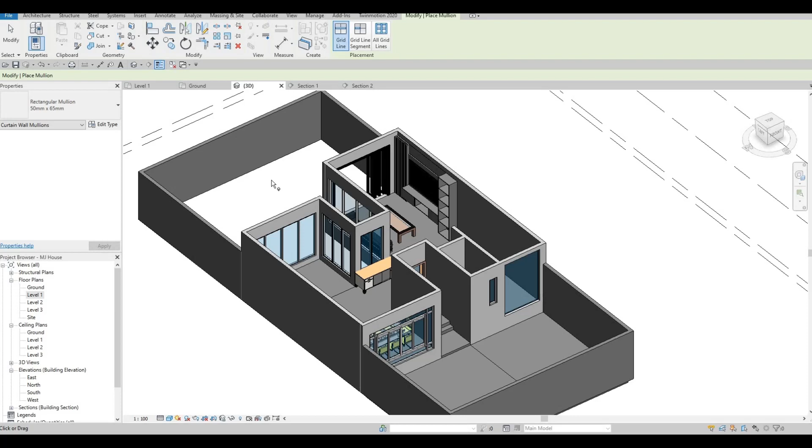So in the previous video, we were able to finish the entertainment center, then we added the stairs right here, and the flooring for the grass, and the carport right here. So now we're going to continue working on this. What I want to accomplish in this video is to finish off the backyard.

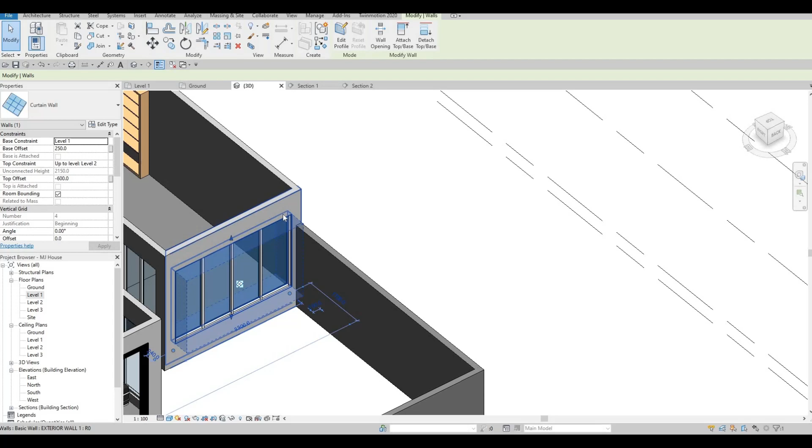What I want to do is go back to level 1, and I probably will need to delete some part right here, because I want to move this one to make it smaller, so I get basically an L-shape kitchen right here. So I'm going to delete this so it's easier for me to just add.

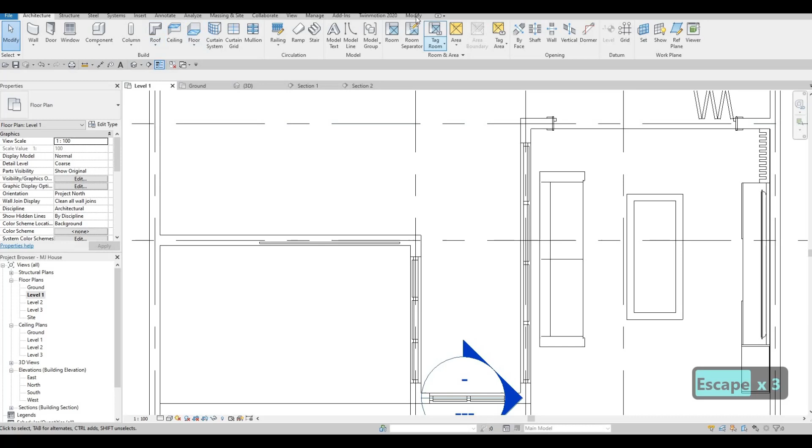I'm going to select this one, CS, and it will maintain the height and the distance from here, so it's easier to just set one first and then do the others. I'm going to cut this one right here, and make sure to make this one L-shaped because we're planning to add more of the kitchen parts right here. After that, I'm going to go to 3D, and as you can see, it maintains the parameters that we set right here.

So now what we're going to do is go back to architecture, click on curtain grid, and then select that one, and add in the mullion all grid, and simply add it like that.

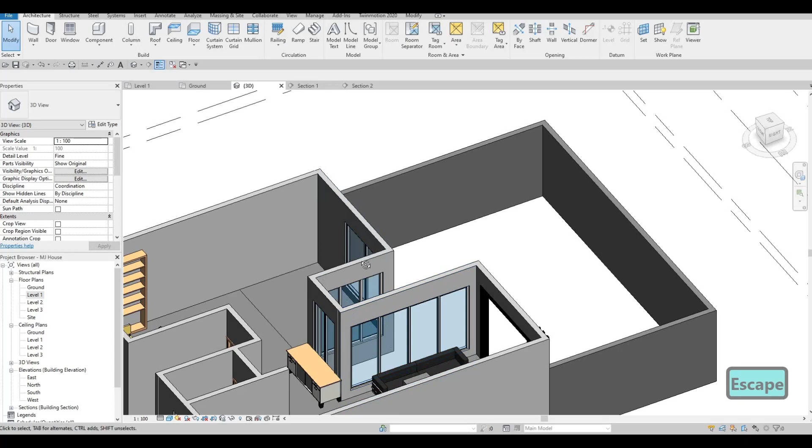So once you're happy and set this up, I'll probably add the laundry right here. This is where the location of the laundry will be, but it's only going to be accessible from the outside.

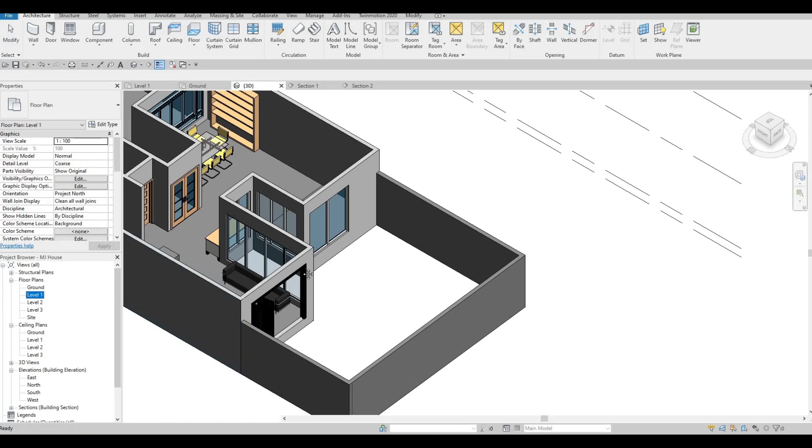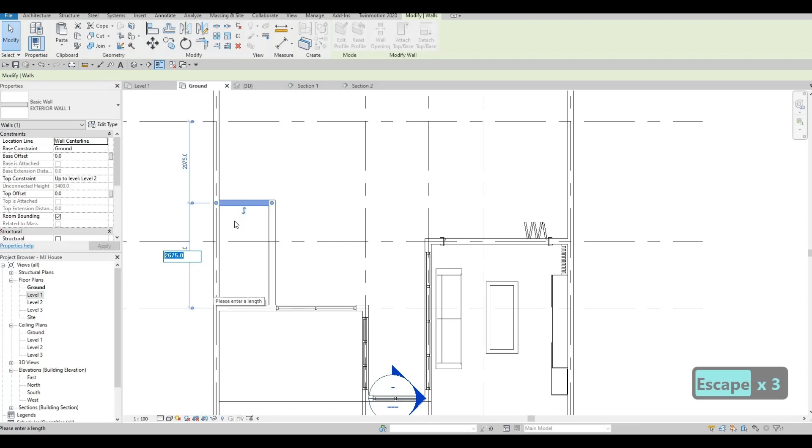So now what I'm going to do is create an extrusion wall. I'm going to go to ground floor and CS on this, and add a wall right here. So it's around, let's make it around 2600 and then 1400, so around 2600 from here, and this will be around 1400 for this, just more than enough space for the laundry.

And then if we check this one, it will look like this. So what I'm planning to do is extend this one all the way right here, and then here this wall will be extended as well.

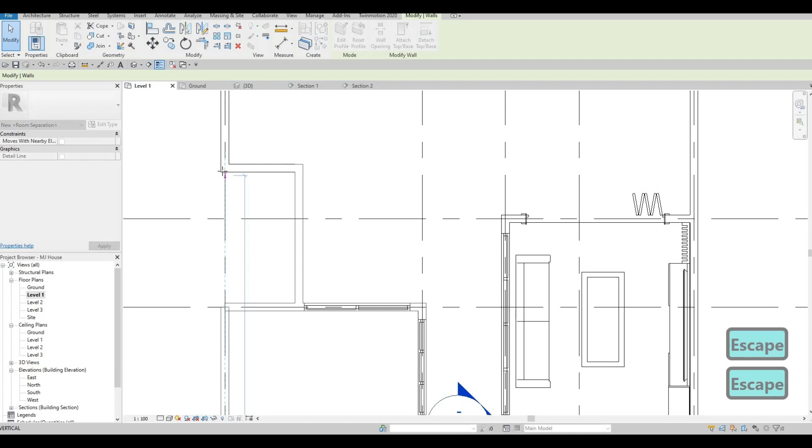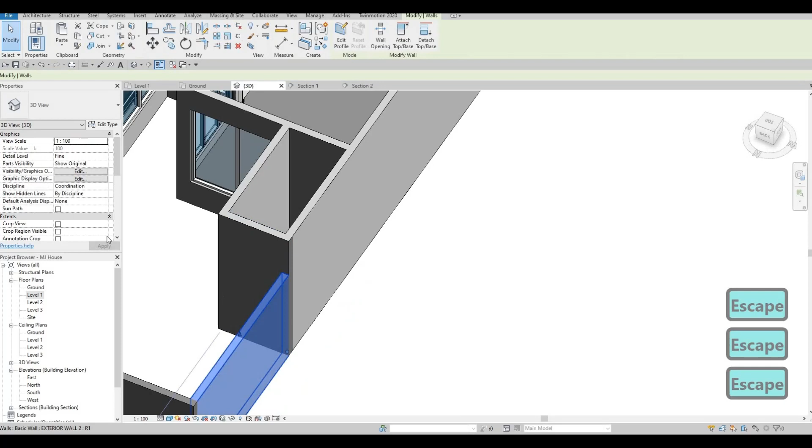So we're just basically adding enough wall on this side, and then here it should be exterior wall, and here exterior wall, and this one is exterior wall number 2. And here, as we remember, we have a different finish.

So this one is concrete aggregate, and what we're going to do is split it this way so that we could have the same materials on all of this. So we're going to split those ones later on, and I just want to change where this is located.

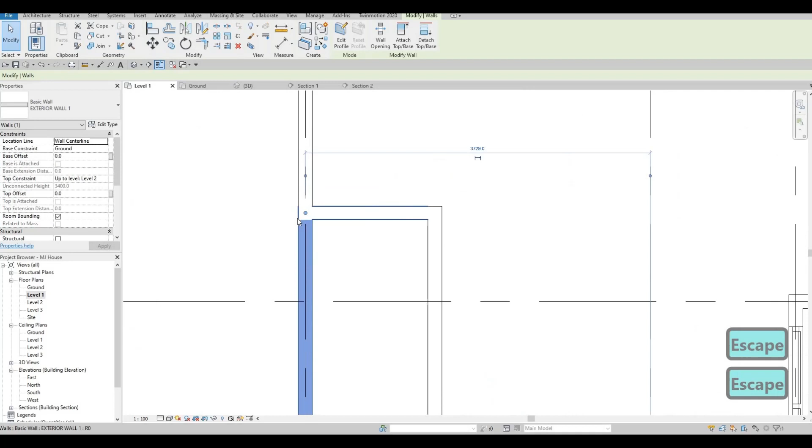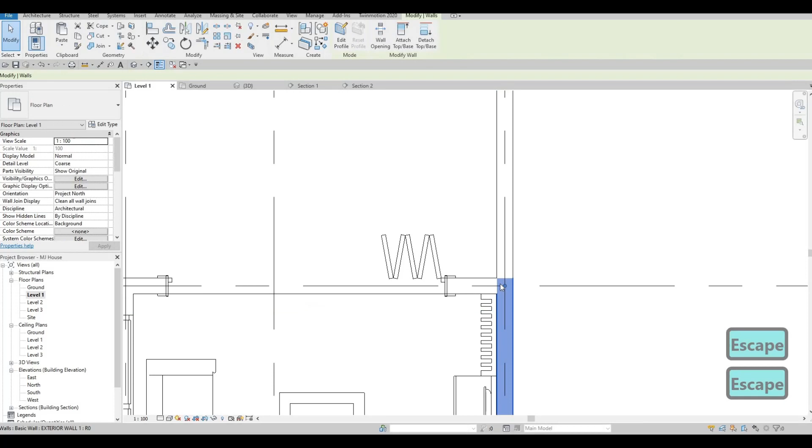And then I'm going to trim this out and put it back. I just want to fix where the joining wall is. Similar to this, we want the joining wall to be on the edge, so I'm going to undo this.

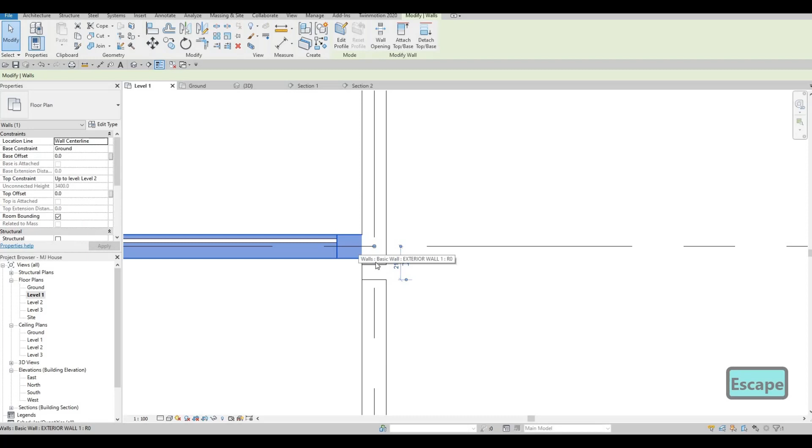So now this is the bigger wall, so it's easier to do later on. Same thing goes right here. Pull this one back first and then change the location of the joining wall.

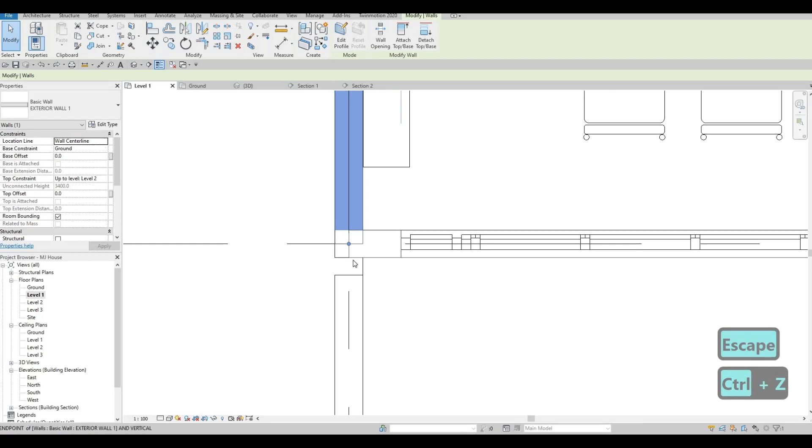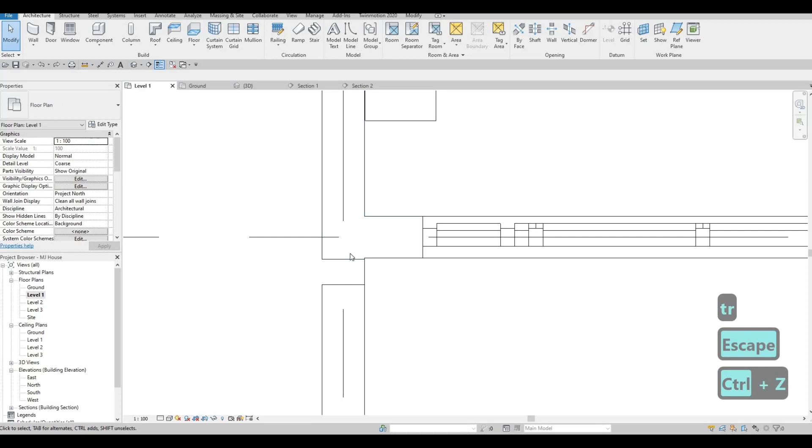Usually once you move it up and pull it back, trim it first, and then now this is the one, because I want this one to have it. So I'm just going to align this AL, and then this is the one that has that. So once we do it, we only think of the face right there.

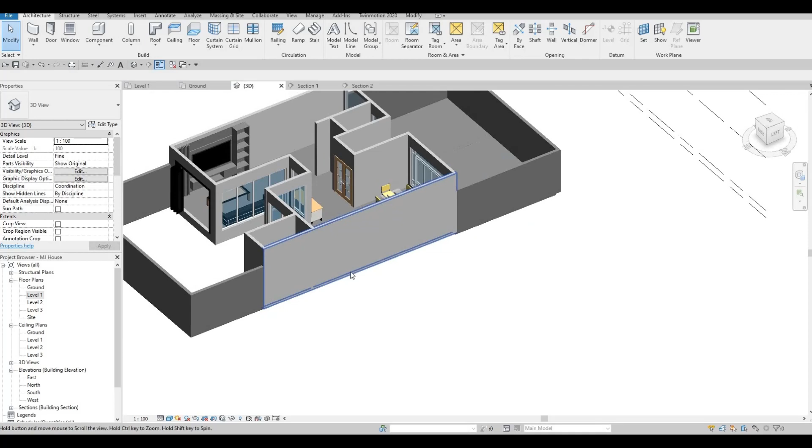So might as well do it now. I'm going to edit this type before we forget. So CS on that, and then you need to select split face, select this face.

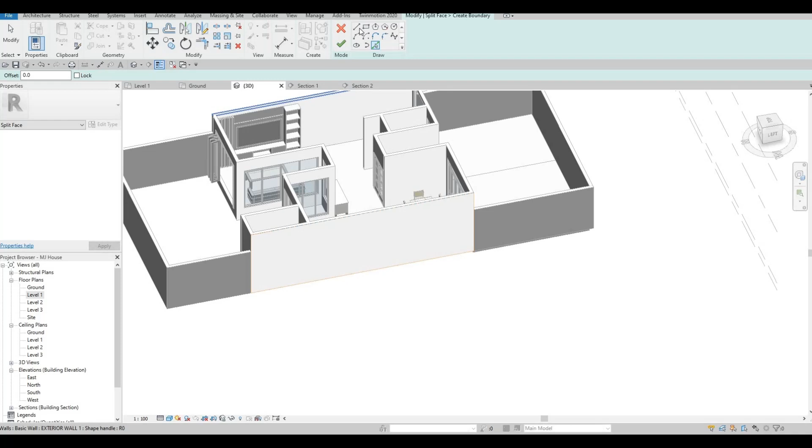Once you do, we need to create a line. So I'm going to create a line from here all the way to there, and then click on finish. After that, click on paint and then look for the same concrete and select that. So now it will be the same one as what we have before.

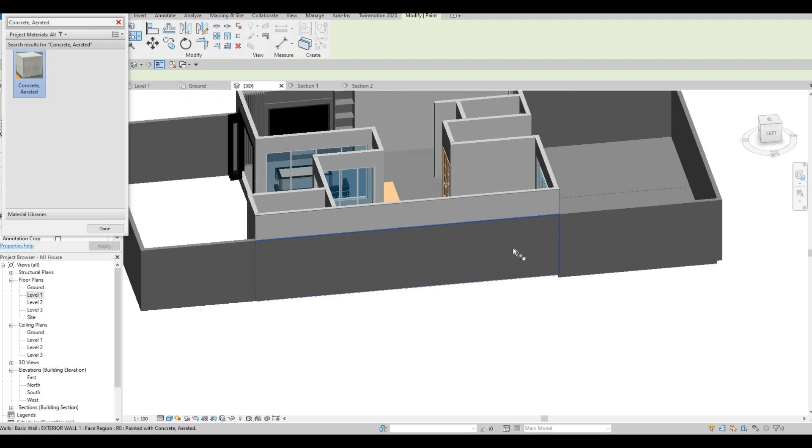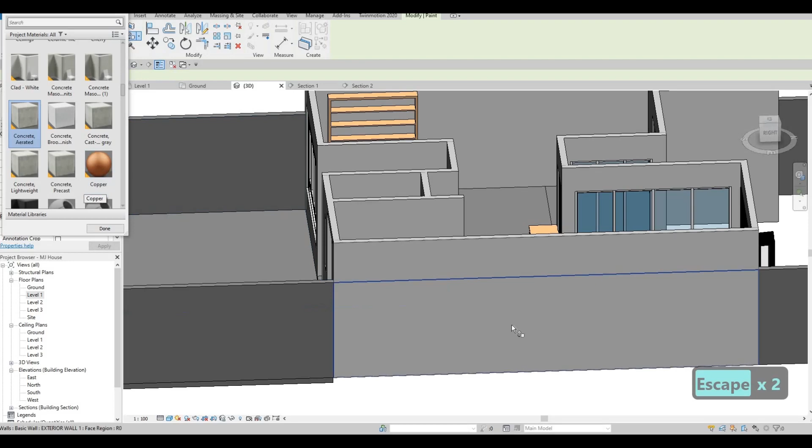At the same time, let's do it on this side as well. Split the face, and then we need to create this line right here, click finish, and then click on paint, same thing. So it looks like everything is the boundary wall, and then only this one is on top of it. This one got created on top of it, so that looks nicer.

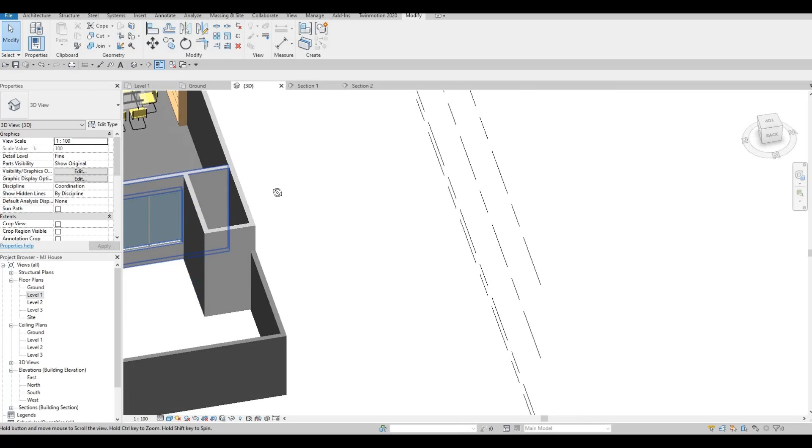So now let's go to this side. We're probably going to pull this one lower than the others, so we might just add the top right here, or we could just leave it like this. So that's good enough.

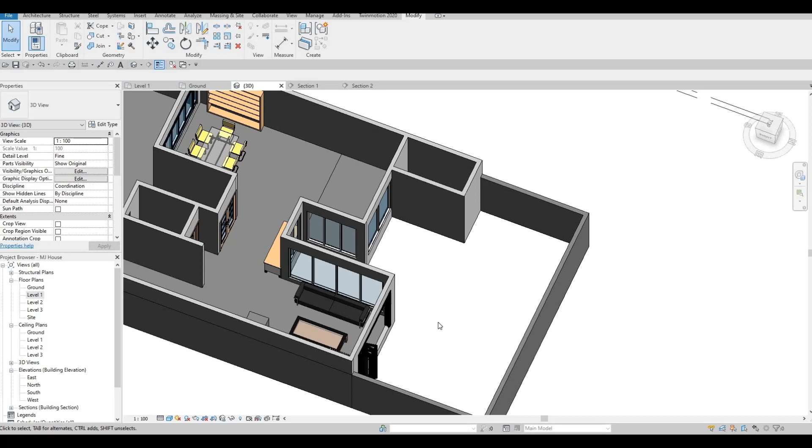We're just going to add a roof right here, and then here we could have a deck that goes around, and then we have our swimming pool right here. So let's create the swimming pool first.

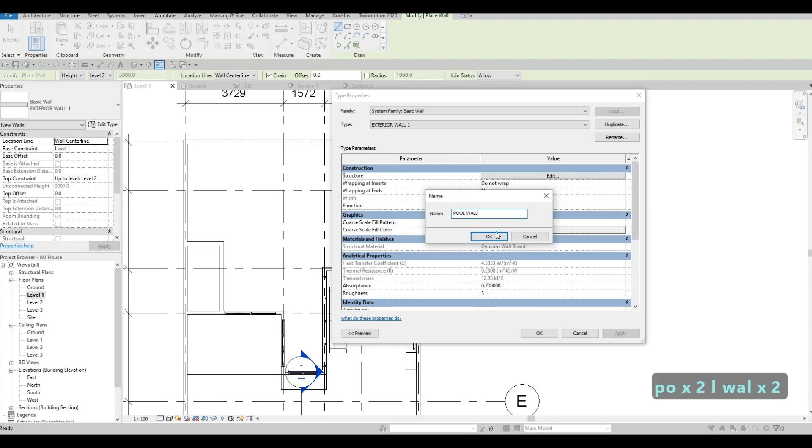So let's go to architecture. We create the wall first. So here, edit type, duplicate. This will be pool wall. Edit, and then here we could just change this one to around 50 thickness, and then here we could put something tile.

So let's look for a tile. Ceramic tile will be good as well. Let's do ceramic tile, and then after that,

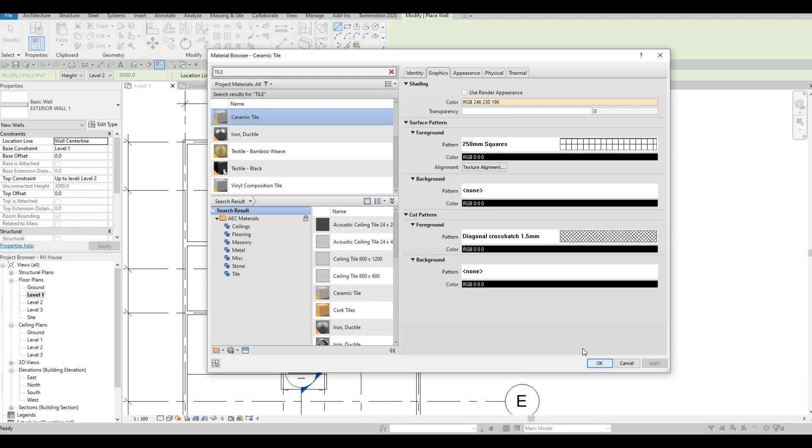let's click on rectangle. We want it to basically be on the ground first, and then click on wall. Pool wall is selected, and then we want the base to be—so top is ground, and then this one, base is ground, and top level is ground.

So what I'm going to do first is change the base to negative 2000, and then let's create a rectangle.

So I'm thinking we have a deck here going outside, and then the pool is somewhere right here.

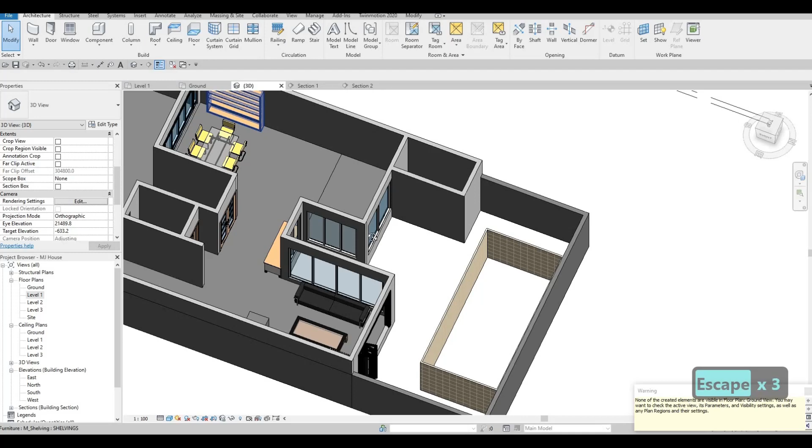Don't worry, it's because of the view range. That's why we're not seeing it. But if we go to 3D, it's right there. It's just not showing because of the view range. But in order for us to see it, go to ground floor and change the view range. And then this one, the depth, unlimited. So it's visible like that.

So now, I want to have a rectangular pool. We have some spacing around it. And then especially right here, we could just select tab, and then we could just move it around like that.

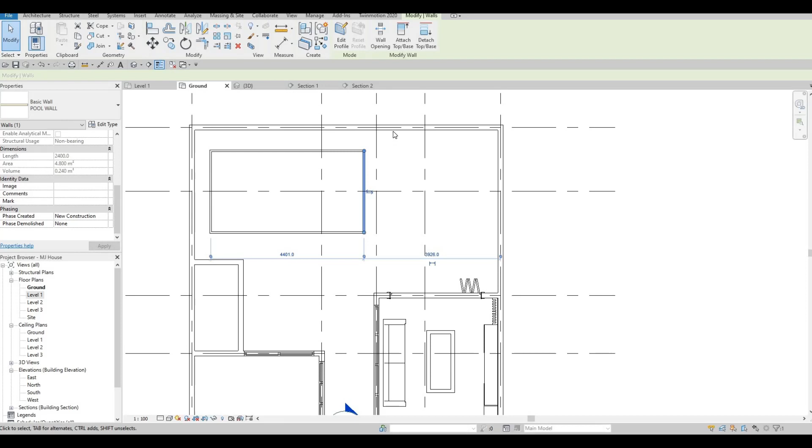And then the deck, I'm going to place it all the way right there. And then I want to give some space, probably just to have a stairs here, a steps here. Let's maybe add it all the way there. We might make it smaller, this one, so that to accommodate the spacing here.

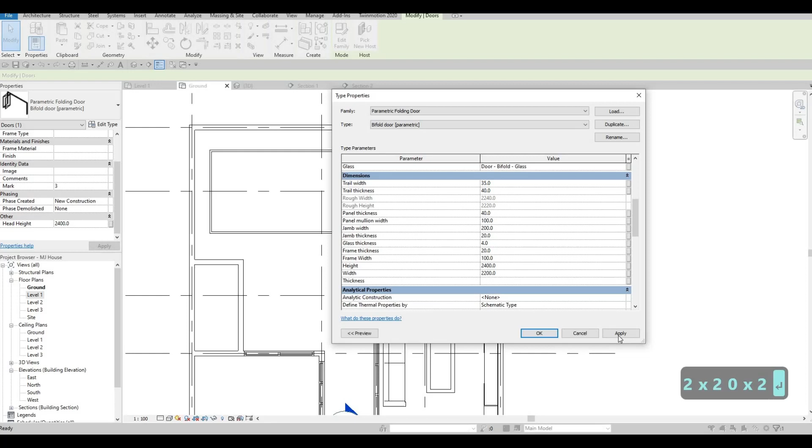I think it's too much for the depth, so here I'm going to edit this one first—the width is probably 2200. And then let's move this one more to this side so that we still have some privacy on this area. Even though this is open, we still have privacy.

And then here we could add in the deck, so it will be another flooring, wood material, and then steps to add. So now I think I'm ready to just leave it like that, and then we could add in a surrounding floor.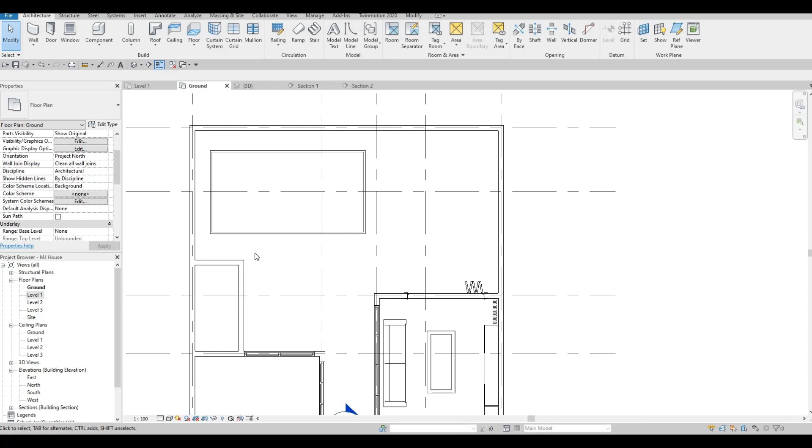I'm thinking of adding some grass as well on some portion, and then maybe this one should be a floor with grass, those kinds of stuff, or so we could just look into that more. I just want to finish the swimming pool first.

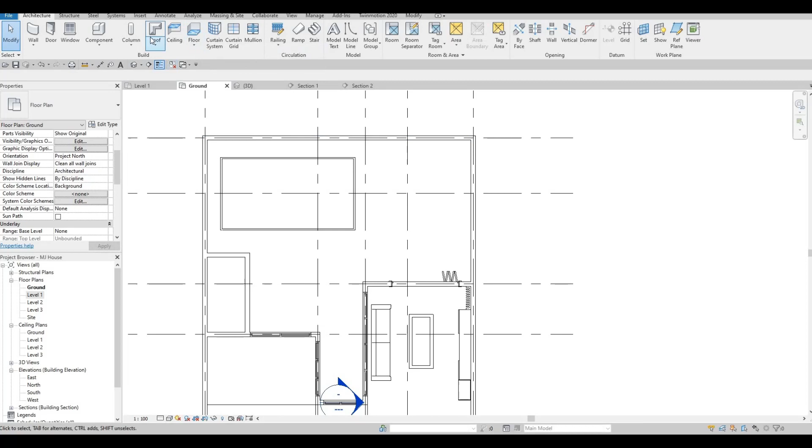Let's add in a model in place. I'm using a model in place so that I could add the floor under there. So extrusion, and then I want not the concrete aerated, I want the same material, so tile, and it's ceramic tile.

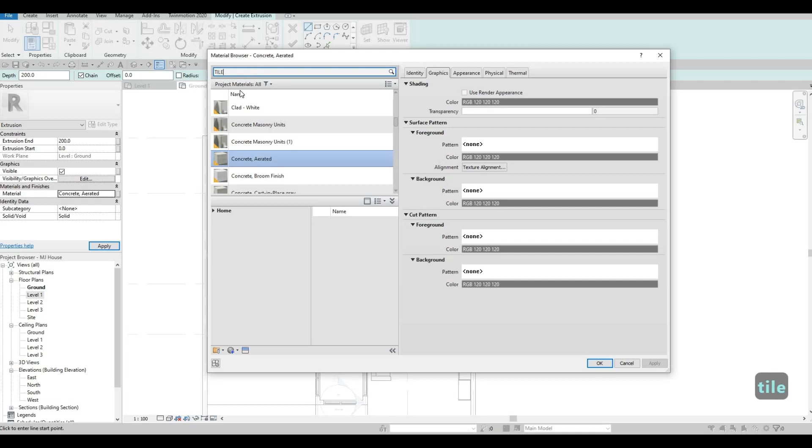I'm going to copy that, and then here I'm going to create something that looks like this, and then let's go to 3D to see how it looks. So click on finish, and then put this one all the way down.

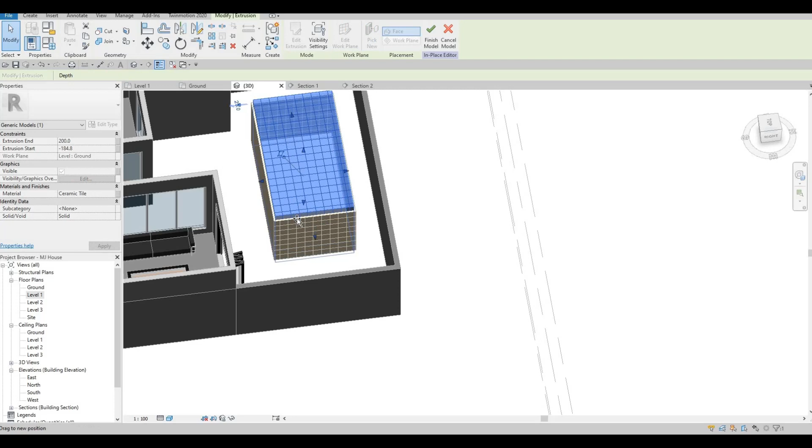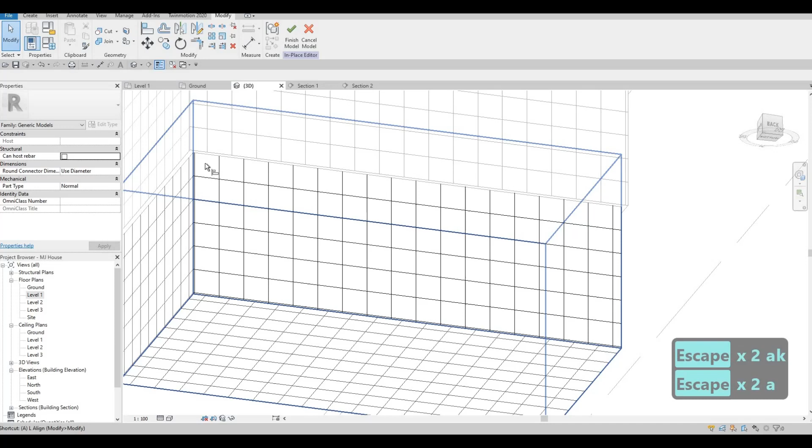I'm going to set this one—just too much, so AL. Click on that, and then click on the bottom, and we want to make it shorter, not too thick.

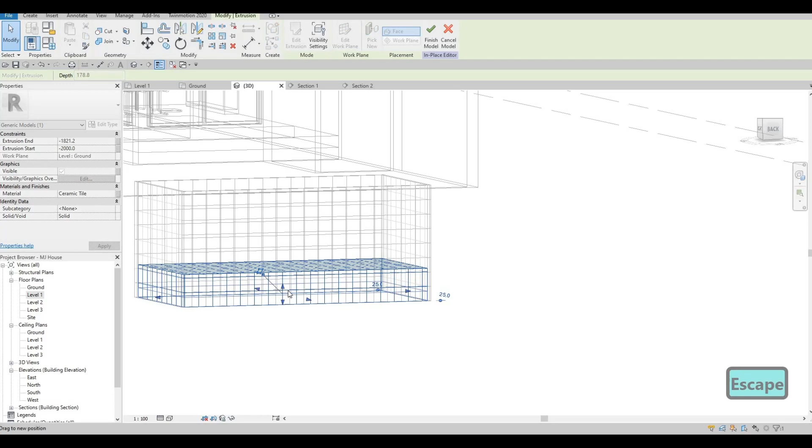I'm going to make this wireframe to see how it looks, so we could just pull it one down. I think that's good enough, and then we could put in some stairs or whatnot.

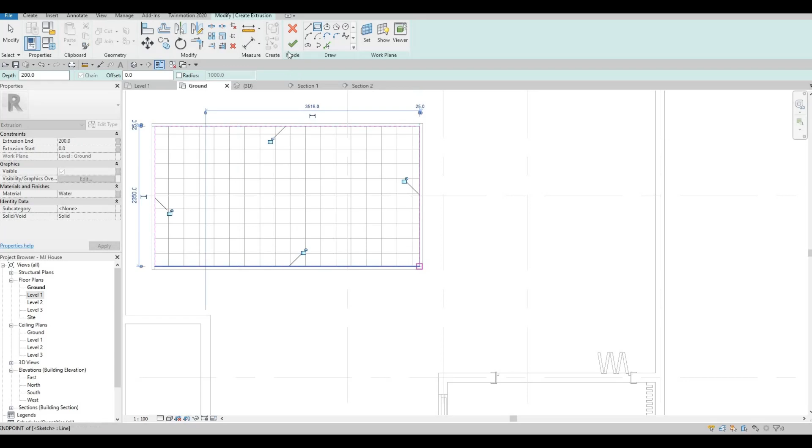And then after this, go back to ground, and then let's create another extrusion, same thing, but with water. Pull this one up, click apply, OK, and then add it on top. And then click finish, look at it in 3D, and we could just pull this one down.

There we go. Click on finish, and then let's change this back to hidden line, and we could see it in the ground and in 3D how it looks. So now we have something that looks like that.

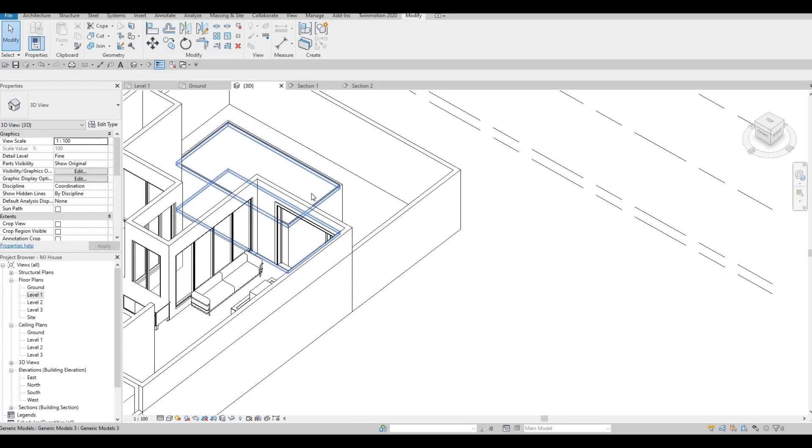And then we could just create the deck. Let's go to ground, add in another floor, edit, duplicate. This will be floor number 5, with a 400 thickness, and this one should be a wood material. So I'm gonna choose mahogany, click apply, OK, and then I'm gonna copy this, Control A, Control C.

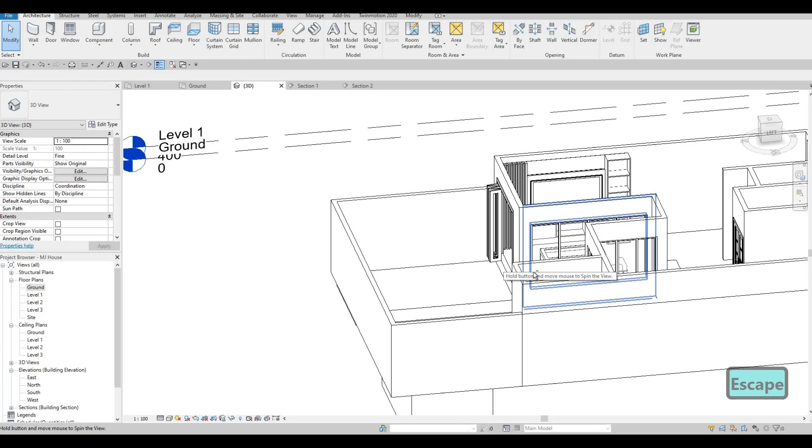And then here I'm going to add something that looks like this, and then click on finish, and let's look at it. So that looks like that. In terms of where it is, should be on actually level 1. So there we go.

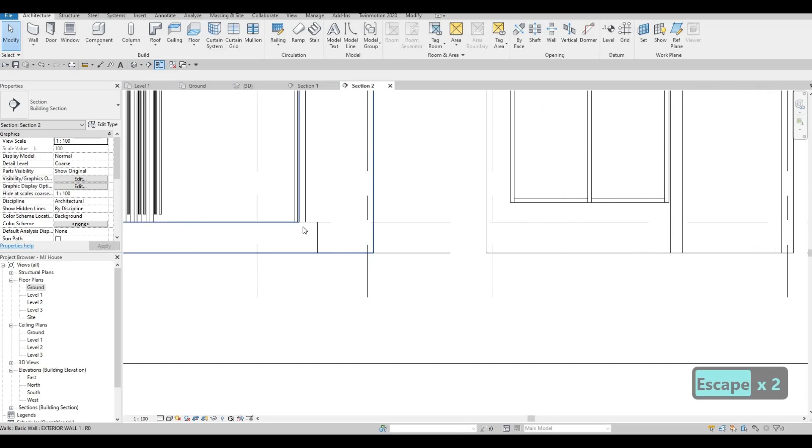And then we're going to create something right here. I'm planning to add a stairs again, but I'm going to create it similar to this, a model in place. So here is what I'm going to base off - a model in place, generic model.

And then here I'm gonna click on extrusion, pick a plane, and I'm gonna select this wall right here, and then click on rectangle, and then here change this to mahogany, and then we're just going to add the steps right now.

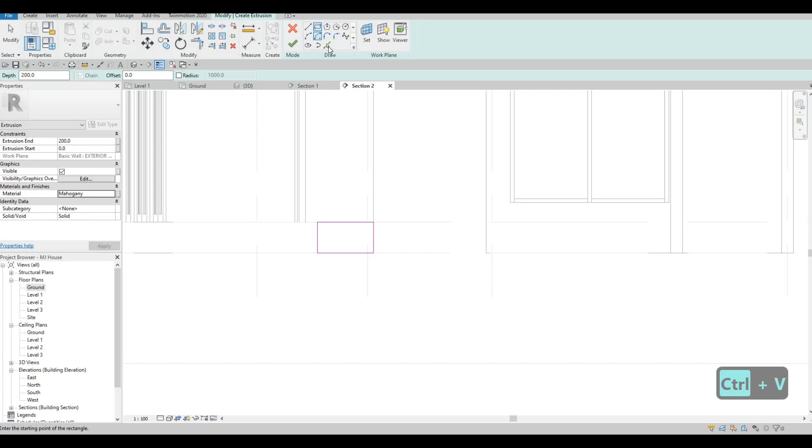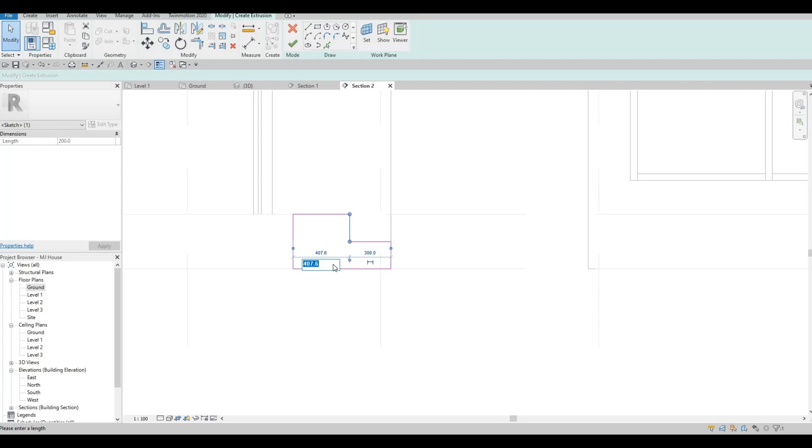We could just add it simply like that, very simple, and we just need to add it in the middle. So this should be around 350. There we go. So that's roughly in the midpoint of that, and then click on finish.

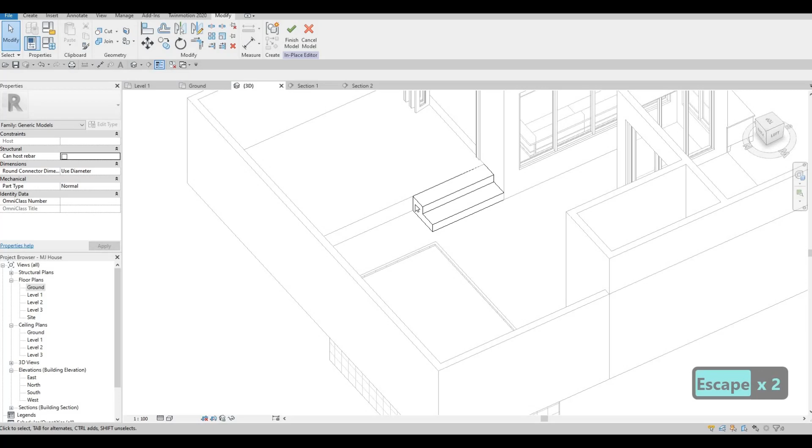Let's look at it at 3D and then expand it a little bit more. And at the same time, we're going to have some railing right here to make it nice, and then right here we could just go back to ground and then add the railing.

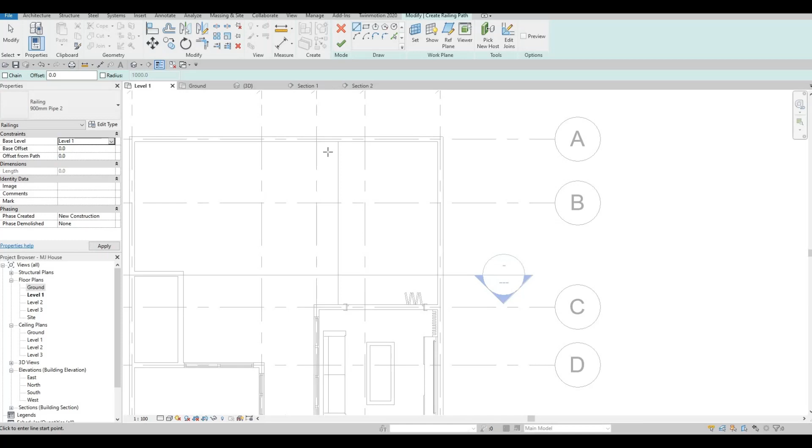Let's use this pipe. Let's duplicate this. Let's put piping number 2, and then let's add this one to level 1. So base should be level 1, and then add it right there. So even though we put it right there, it should be on that side.

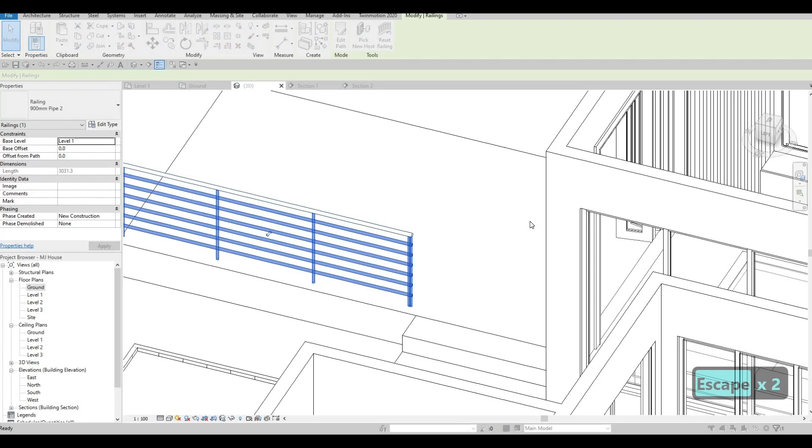Click on finish, and obviously we could do much better work right here. Instead of this one, I want it squared. Rail structure, circular, I don't want that. I want it squared. And then technique here is you could just copy and then Control C, Control V on those to make it faster for you.

And then click apply. Okay, and then here I want it to be squared as well, and then baluster, I don't want it right there, I want it squared as well, and then squared. So I want it to be consistent with all of them.

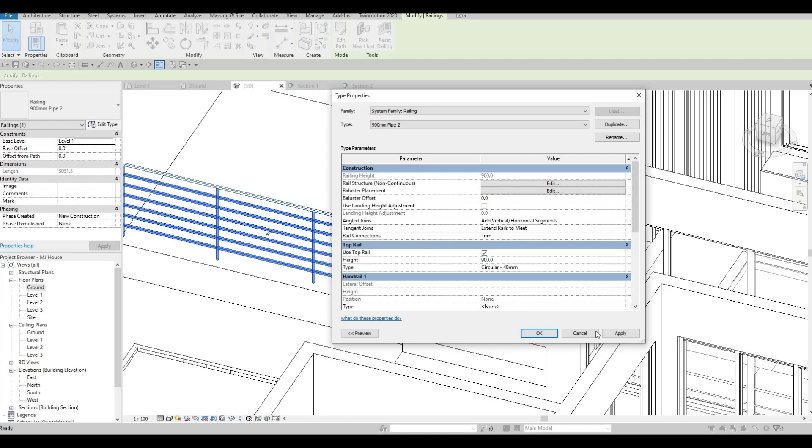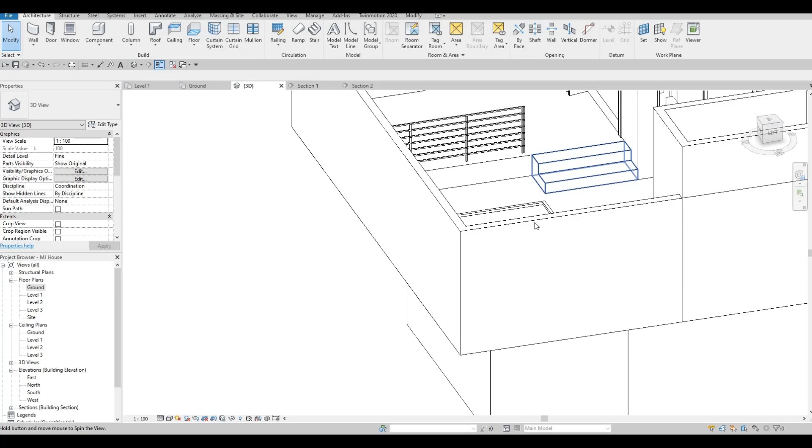And that looks like that. So I'm happy with that. The only thing that I forgot is to add the material, but we can add it later on. I'm not gonna be focusing too much on that. So at least we have some handrail there, and we have some steps. We could always just push this one all the way there so that there's no issue with that, but why not add a railing as well here?

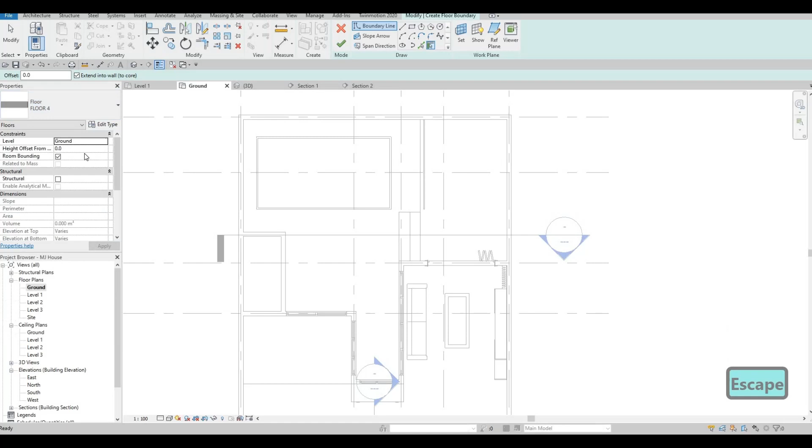At the same time, we could add in floors. So select this, edit type, duplicate. I'm gonna duplicate one of the floors. I'm not gonna duplicate this one because I want to maintain the 200 on others, and I'm just going to select a different material, so probably concrete. Not the block pattern, but this one, something different.

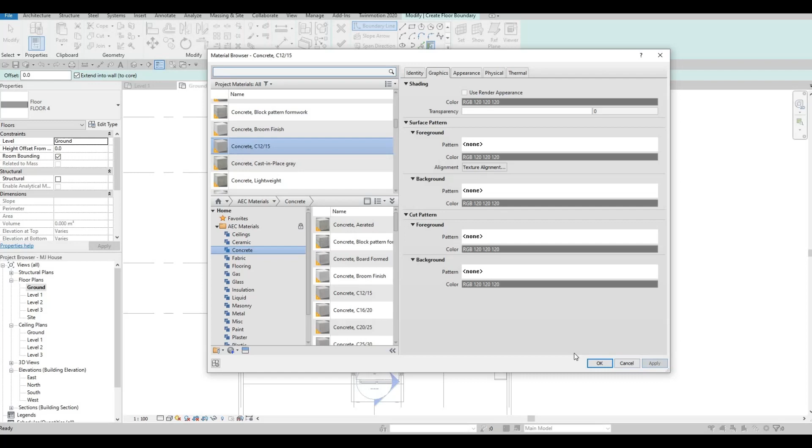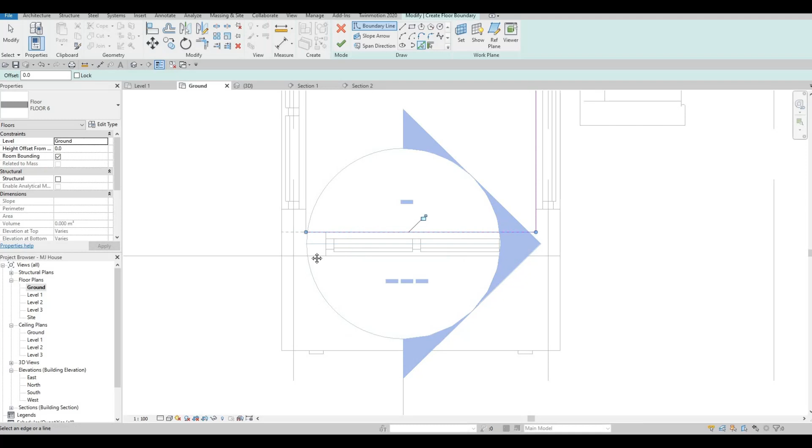And then here I'm just going to go around here, and then let's pick this one right about there, and then just all around this area. And then let's trim and extend.

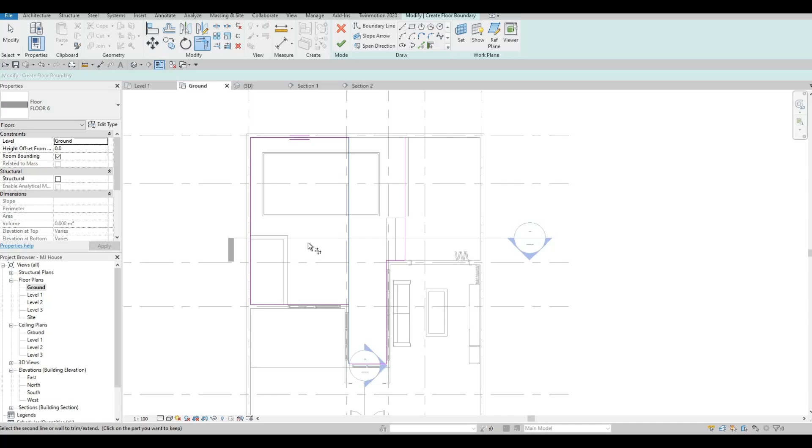And probably I'm gonna add this one as the same floor. So I'm just going to just leave it like that for now. And this one we just need to trim and extend on this one, and then trim and extend on here. Click on finish, don't attach, and then we forgot to create an opening there.

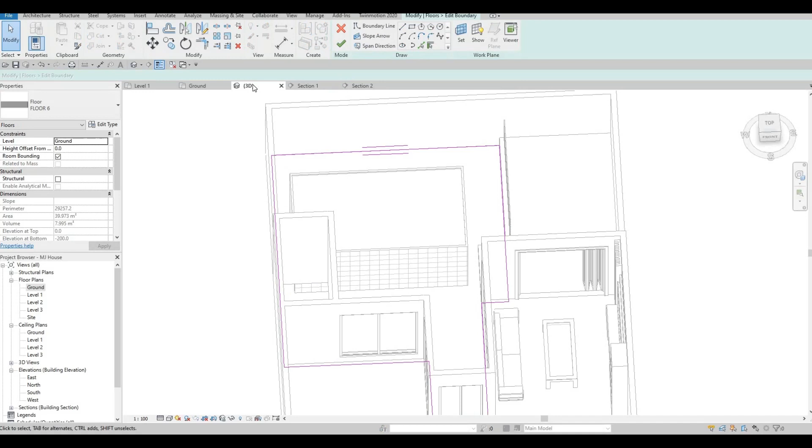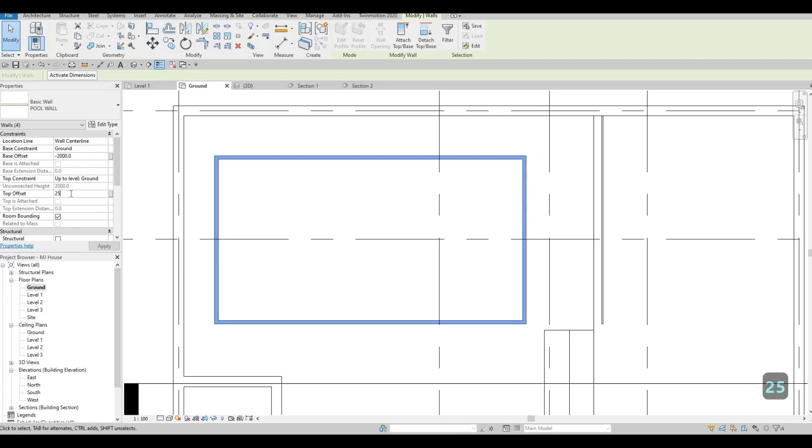So might as well just select a rectangle and then just add this one like that. Don't attach. And then here for the walls, I want my walls to have at least 25 top offset, so at least it's a little bit on top of there. So let's stop here for now and continue in the next video.